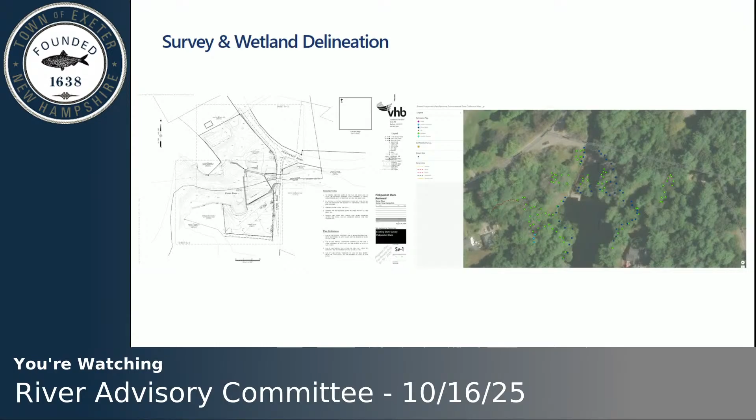So the first thing that we did as a design team was we did a site visit. So typically when we're doing these projects, we go and identify some reference reaches. Reference reaches are used to essentially characterize the river both upstream and downstream of the dam site to see what we want the river to look like through that dam site and what the goal is for that cross section.

So two things we do are channel geometry. So we set up a string line across the channel and we measure important grade breaks throughout the channel to see how steep the banks are, how flat the river bottom is, and if there's any sort of defined channel within the river section.

What we also do is a pebble count. The goal of this pebble count is to get a gradation of the stone within the river channel to see what stone we need to spec during the design, to see how big that rock needs to be and how diverse. You can see the river channel. This picture right here is taken just downstream of Cross Road.

So you can see the river channel, and again, the flows are, as you guys all know, very low. So while it's not beneficial for the river, it was really beneficial for this site visit to be able to really get a good look at the river. And I'll show you some more pictures later that were pretty interesting. So you can see the river bottom is pretty flat, and there's some larger rocks in here.

So how the pebble count works is we did technically two pebble counts, one upstream at Haigh Road, one downstream at Cross Road. And what we do is we pick up 100 rocks, measure them, and record it. So that's me out there recording. My coworker John, he's picking up 100 rocks, measuring the dimensions, and I'm recording it. So he picked up 100, I picked up 100 downstream of the dam, and we did the same thing upstream of the dam. I picked up 100, he picked up 100.

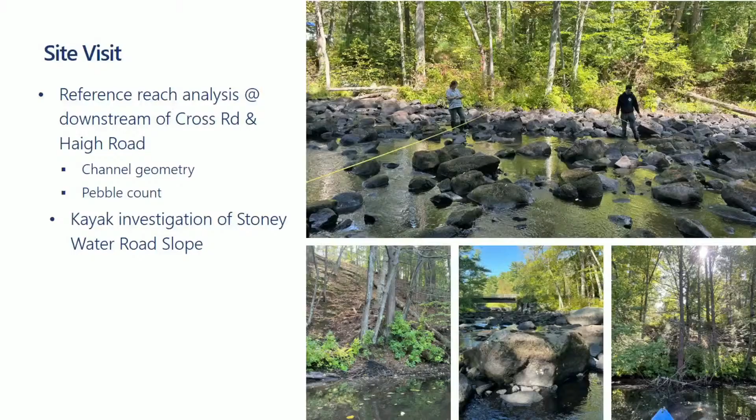It was interesting to see too that the rocks have a very specific coloring. They're all very dark and black. So with our design, as silly as it sounds, we'll be looking to match the same color as the rocks there too to make sure it looks nice and uniform. So that was the result from our stream bed pebble count analysis.

And then I mentioned the slope off of Stoney Water Road. So we're working with PAR to do a geotechnical analysis. We did a single boring at 0 Stoney Water Road. It's about the first house, I think, on the road there. It's at the highest point on the slope. We did a boring down to 81 feet, so that was 35 feet below the impoundment level.

We found that the groundwater is about 5 feet above the typical impoundment water level. The soils are mostly medium to dense, clean sands, and we did not encounter bedrock. So we'll use the information from our site visit and this geotechnical exploration to do a study on the slope stability, find out for sure if lowering the impoundment is going to influence that slope at all. And then if it does, we'll work to come up with a design and plan to stabilize that slope. So those are the next steps regarding the subsurface and geotech analysis.

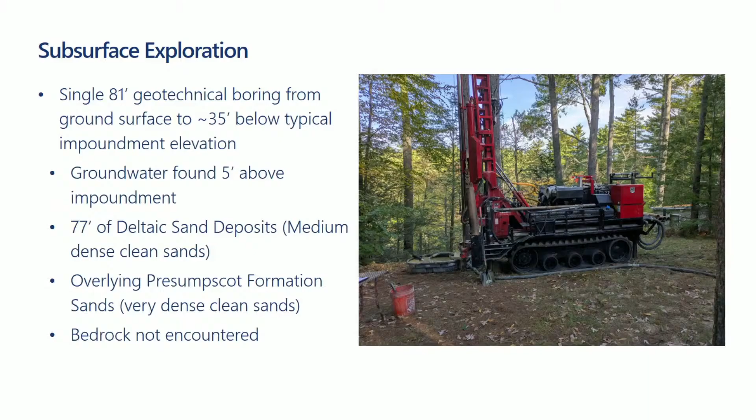Cultural resources. I'm sure some of you might be familiar with the cultural resources Section 106 consultation from the Great Dam removal. We started this process in the feasibility study phase, and it was really just on a concept level to get an understanding if we were going to have an adverse effect if the dam were to be removed. During the feasibility study phase, we got feedback from DHR that made us believe that removing the dam would result in an adverse effect.

What we did was submit the request for project review, which is typically just referred to as the RPR. What that does is officially start the process with the Division of Historical Resources, and they give us their determination on what will be required as part of the historical resource investigation with removing the dam. They have said, as of this week, that removing the dam would result in an adverse effect. As part of that, they require a Phase 1B archaeological investigation.

During the feasibility study, we did a Phase 1A archaeological investigation. The Phase 1A is essentially a higher level analysis to see if there's a presence of any historic resources or archaeological artifacts. What Phase 1B does is they actually go out and dig a lot of test pits and see if they can find anything. So we will have to do that. That is scheduled for December, but it's weather dependent. If there's snow on the ground, we won't be able to do that.

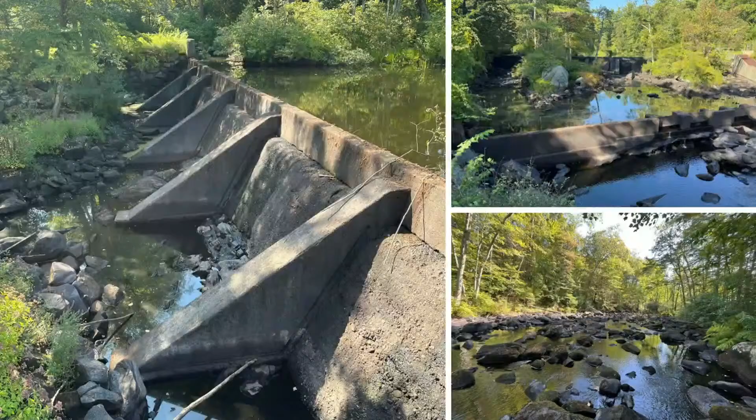So with those sediment probes, I want to show you some pictures. We went out 2 weeks ago in the kayak, and what we did is we have these long rods where we'll bring the rod down, measure to what elevation we hit sediment, and then hammer down as hard as we can to see if we can get refusal, or you can really feel as you're doing it, you can feel and hear if you're hitting bedrock.

So what we did with that is find out what elevation bedrock is, and we wanted to make sure that we were achieving our design depths. So you can see back here, we have specific elevations that we're trying to achieve with this channel profile, and we want to make sure that we can actually get these elevations without having to go through bedrock. We don't want to be blasting through to achieve some of these depths.

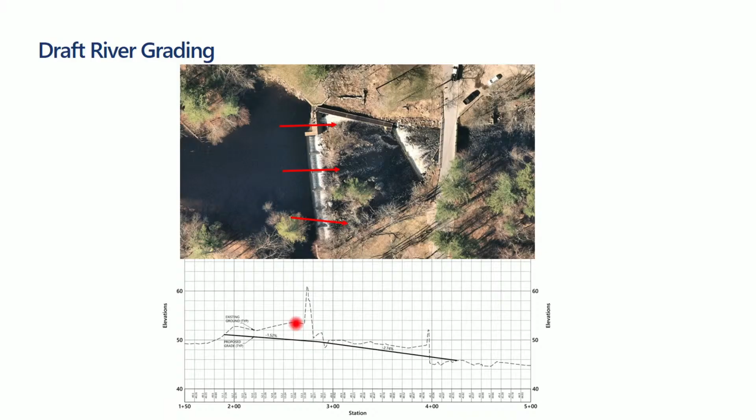So you can see what normally you can't see because water's flowing over the dam pretty significantly: this rock here, this dam is sitting on top of bedrock. See in this corner here too. I have some better pictures later on too to see that. So we got our kayaks right up to the edge here, and we were able to hammer down and identify what elevation the bedrock was at here to ensure that we'd have our design depths there.

These really aren't ideal conditions to do this work, huh? Unfortunately. Yeah, so we actually went out twice in the past month, which normally we don't do, but because there's so much to see, we really want to take advantage of it. So it's been really helpful, though I feel bad for the river.

So this is just a section picture looking at the dam and where the 3 channels would be. So we'd have one channel through here, one channel through the middle, and then one channel where we're planning to remove the fish ladder here. And then we'd also be wiping out this lower training weir. And you can see that this is a section of bedrock here that this also sits on as well. And this is just a picture of the river channel looking downstream and what we'd be looking to mimic. So it gives you an idea of what the channel cross-section would look like.

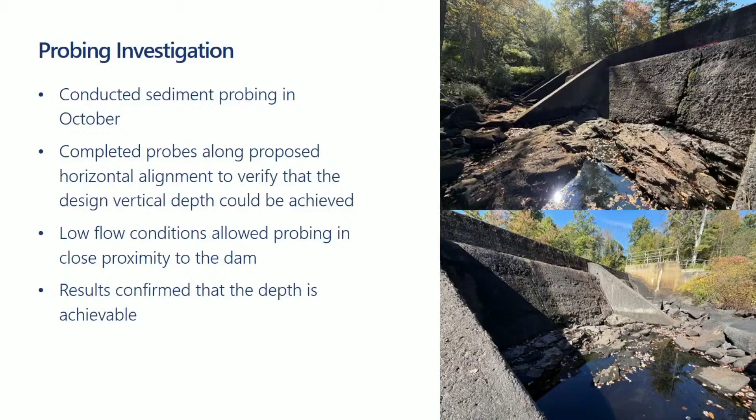So it's exciting to get those results, because, like I mentioned before, we are trying to do as passive of a design as possible. Really just trying to bring the river back to its former glory. And that kind of leads us into our next steps. So we're looking to submit the 30% design plans at the end of October. That's going to be a preliminary plan set that has our grading, the existing site plan. We'll have a layout of what that river access might look like. And then with the 60% design plans that we would prepare after, that's where we'll have detail on the demolition of the dam and the staging and construction sequencing.

We have a public information session scheduled for Saturday, November 1st from 12 to 1 p.m. This is where we're going to invite the public to come meet us out at the dam site. We'll have a few poster boards of the design up to be able to look at that design and try to visualize it in real life and talk through the design components.

In the middle of this, which I did not add in here, is we actually submitted a letter of intent to the Great Bay 2030 program again for another round of funding. They release money every year, and we submitted a letter of intent a few weeks ago to request an additional $350,000 to finish the design phase and get the project ready through bidding. So everything would be completed through bidding, and then it would really just be the construction fees that we'd be looking to get covered. If we're invited to submit a full proposal, we'll find that out on November 30th, and then the final proposal is due, I think, second week in December.

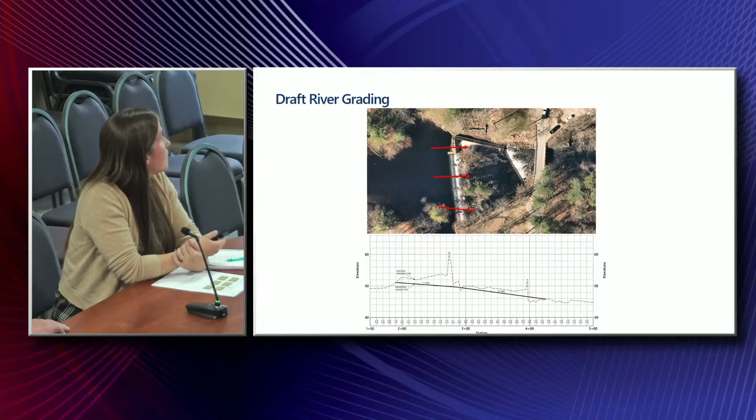Okay, is there any other business? Any public comment? We don't have any visiting people from the Pickpocket area attending our meeting. Yeah, we're planning to notify. We're not sending out mailers, but we plan to notify the meeting. As one representative of this committee, I plan on being there for that session. And anyone else, of course.

So we would be invited to the same public session that you're having for the Pickpocket folks, right? Yes, you can be part of the public. We can't require your attendance, but we really want it. This is something that Public Works is putting on, so there is no real requirement of anything. We're going to have a discussion. I'm happy to go there. But we need to be alerted as to the time and place and so forth. So how would that happen?

Yeah, that one is not scheduled yet. But how would we hear about it when it is scheduled? You'll hear about it at our meeting in February. It's actually after that meeting. Yeah, okay, right, we'll have it planned. Okay, so we'll know. How do you define abutters? The abutters are going to be the direct abutters for this meeting. For that, how do you define it? Because there are different definitions of abutter.